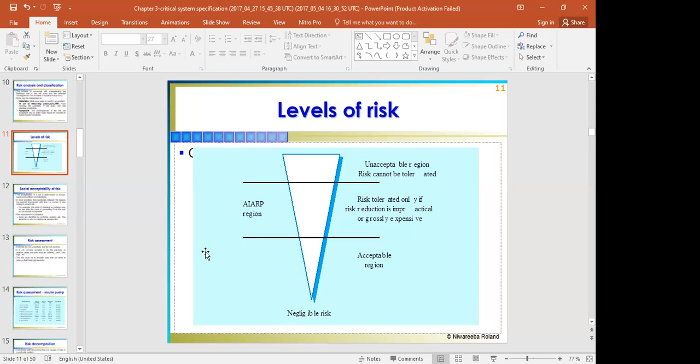So that's about the social acceptability of risk. This thing takes some time to change - I don't know why.

So the next is risk assessment. Remember, I'll just go back so as to keep us focused on how we are moving. We skip risk decomposition - just a second - risk identification, analysis... no, we didn't skip decomposition.

So risk assessment: estimate the risk probability and the risk severity. Once you've looked at these three categories, it's normally not possible to do this precisely, so relative values are used, such as unlikely, rare, very rare, high, etc. The aim must be to exclude risks that are likely to arise or have high severity.

This is an example, the insulin pump - this is its assessment, the assessment for the insulin pump. You can look at them individually later. Now, the risk assessment really is once you've finished the analysis, then what you've come up with - for example here is the risk assessment, like for the insulin pump, what you've come up with after you've done your analysis.

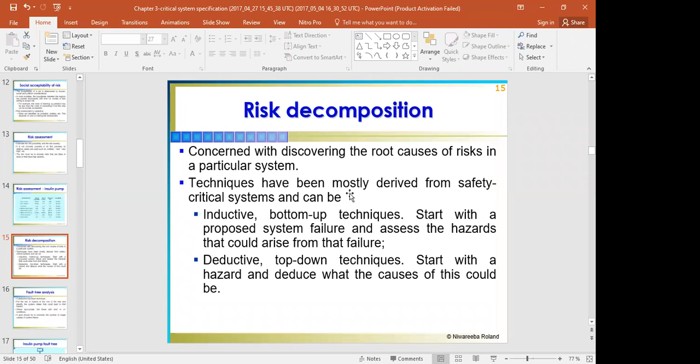Let us have a look at fault tree analysis, which is an example of a deductive top-down technique, and we shall see it in this diagram here. So here you put the risk or hazard at the root of the tree, and then you identify the system states that could lead to that hazard.

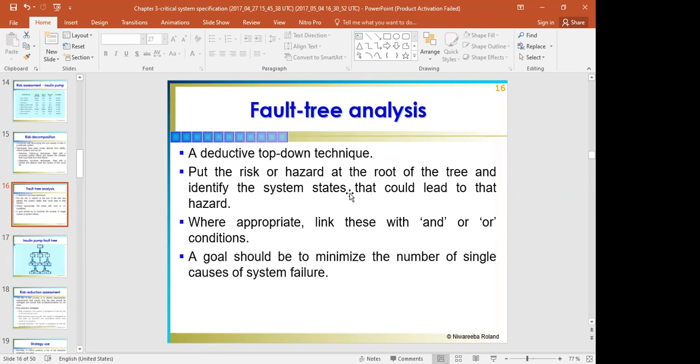A better way to explain this, because here they don't really give it in detail, I will refer you to this very book here. Let us look at it - page 13.

Here they give the detailed explanation of what we've been talking about. You put the risk hazard, the root hazard, at the root of the tree, and then you identify the system states that could lead to that hazard. This is exactly what is being done here.

Beginning with the hazard of incorrect insulin dose administered, they explain that there are 3 conditions that could lead to the administration of an incorrect insulin dose: incorrect sugar level measured, correct dose delivered at the wrong time, or delivery system failure.

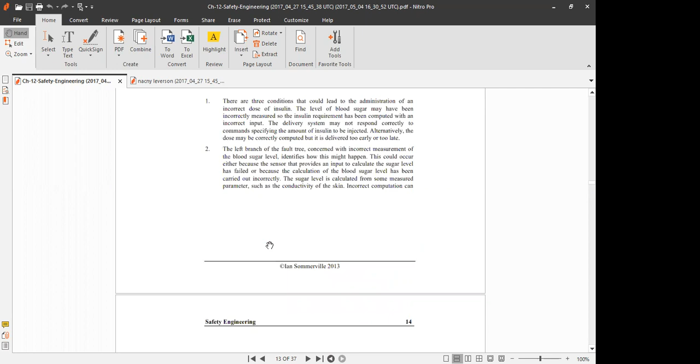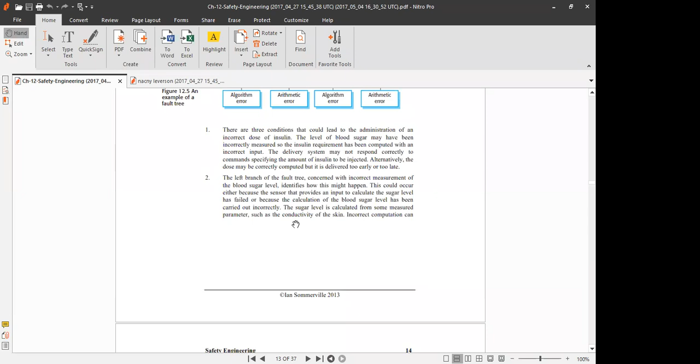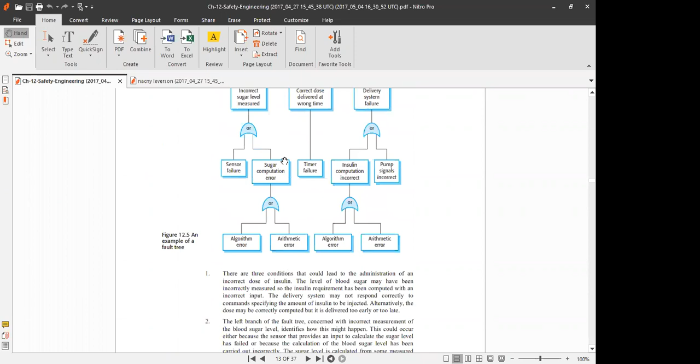If you go further, this one ends here, but then it continues on this arm. The sugar level is calculated from some measured parameters, such as the conductivity of the skin. Incorrect computation can result from either an incorrect algorithm or an arithmetic error that results from the use of floating point numbers. So you can see we have gone right up to the root cause. I hope this page is clear to all of you.

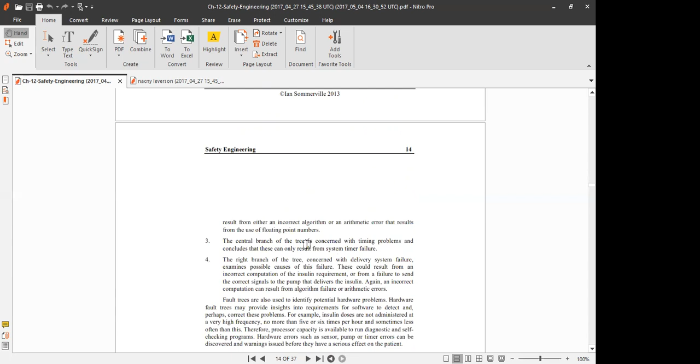The central branch of the tree is concerned with timing problems and concludes that this can only result from system timer failure. There you are, timer failure.

And then the right branch of the tree, concerned with delivery system failure, examines possible causes of this failure. This could result from an incorrect computation of the insulin requirement or from a failure to send the correct signals to the pump that delivers the insulin. So I hope you see the step-by-step analysis of the fault tree: insulin computation incorrect or pump signals incorrect.

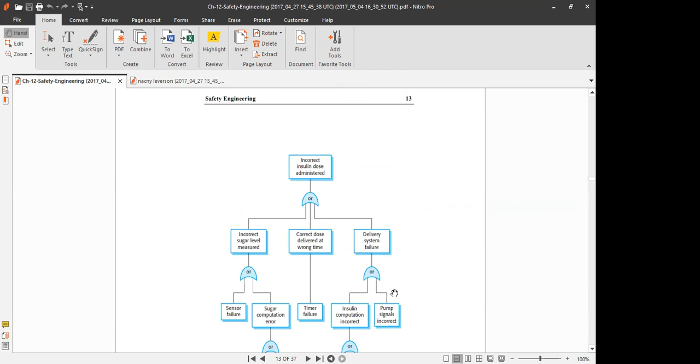Again, an incorrect computation can result from algorithm failure or arithmetic errors. Again you can see that here, up to the root cause. That's what they call the fault tree analysis, very well explained here with an example of the insulin pump.

I also want you to take note, however, of these fault trees. The fault trees are also used to identify potential hardware problems. They explain that further down here - fault trees are also used to identify potential hardware problems. Hardware fault trees may provide insights into requirements for software to detect and perhaps correct these problems.

For example, insulin doses are not administered at a very high frequency, no more than 5 or 6 times per hour, and sometimes less often than this. Therefore, processor capacity is available to run diagnostic and self-checking programs. Hardware errors such as sensor, pump, or timer errors can be discovered and warnings issued before they have a serious effect on the patient. I want you to take note of that as well.

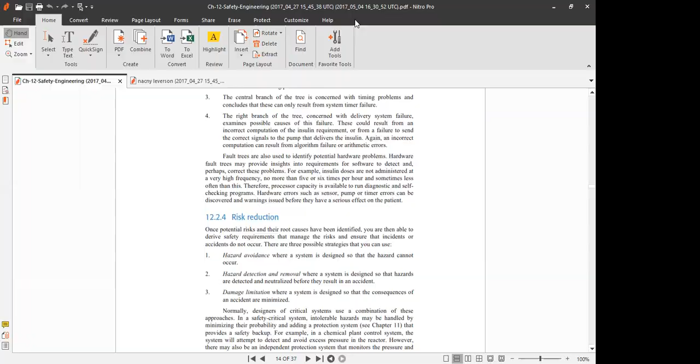So we can go back to the PPT. That's the insulin pump fault tree. It's the fault tree analysis, but we're looking at the insulin pump particularly as our example there. So let me share my screen.

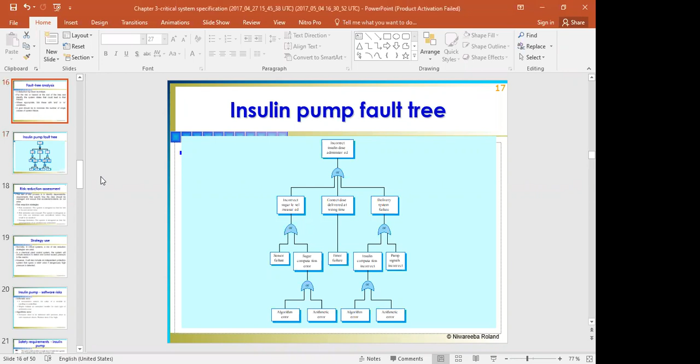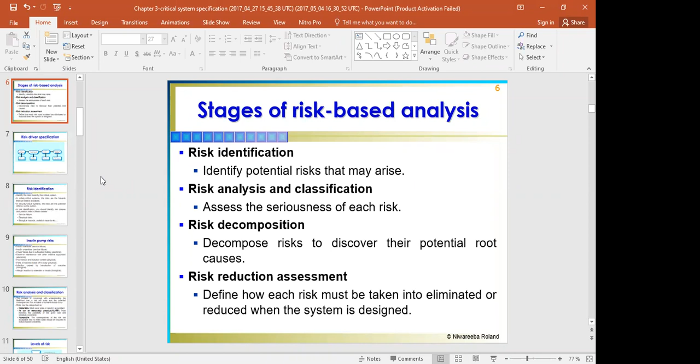So we have finished risk identification, risk analysis and classification, risk decomposition, now risk reduction assessment. We have to be systematic in this and not get lost. So that's the next one here, the risk reduction assessment. The aim of this process is to identify dependability requirements that specify how the risks should be managed and ensure that accidents or incidents do not arise. All the steps we have been taking all come up to this point - the dependability requirements that you're going to come up with to reduce your risk.

And these involve 3 risk reduction strategies, of which we have risk avoidance: the system is designed so that the risk cannot occur. Then we have risk detection and removal: the system is designed so that risks are detected and neutralized before they result in an accident. And then we have damage limitation: the system is designed so that the consequences of an accident are minimized. So these ones here are not new, at least.

You have them there. But then also the designers of these systems may use a combination of these approaches, because of course you're not going to say you're going to only use one, depending on how your system is and the risks that you've come up with, you may have to have different ones.

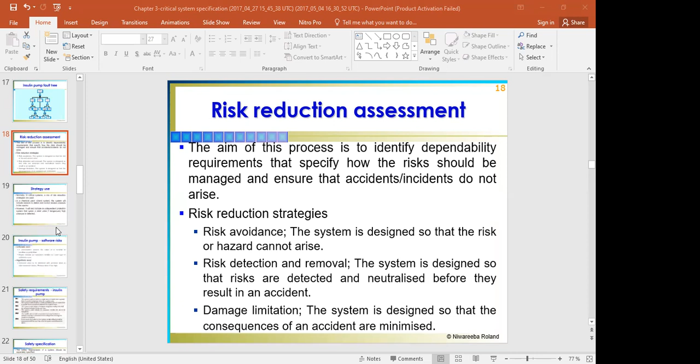Okay, to the next. Yes, that's what they talk about next there.

You can have a mix of risk reduction strategies. In a chemical plant control system, the system will include sensors to detect and correct excess pressure in the reactor. However, it will also include an independent protection system that opens a relief valve if dangerously high pressure is detected. So you can mix, you're not tied to one.

Not tied to one. Okay, so we talked about this. We saw this already, just explained further here, but we had seen them already from the function analysis.

So some of the safety requirements of the insulin pump - these are examples of safety requirements that you've come up with. Remember, we're coming up with dependability requirements, and dependability involves safety, security, availability, and reliability. So among the dependability requirements, we have safety requirements of the insulin pump.

The examples are here. SR1: the system shall not deliver a single dose of insulin that is greater than a specified maximum dose for a system user. So that one is a safety requirement - the system, even if it makes a mistake, as long as it doesn't go beyond a certain maximum, it's not as dangerous. So something may go wrong, it gives the wrong amount of insulin, but then not going beyond a certain maximum.

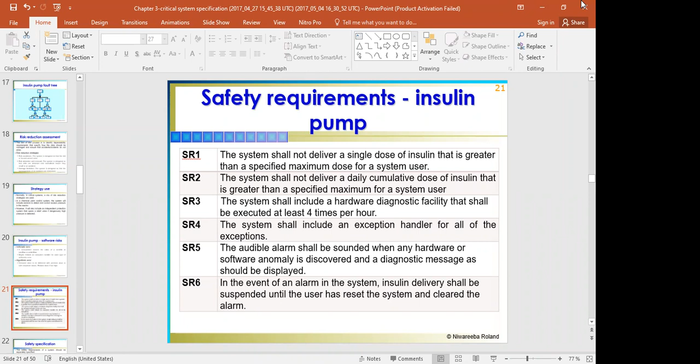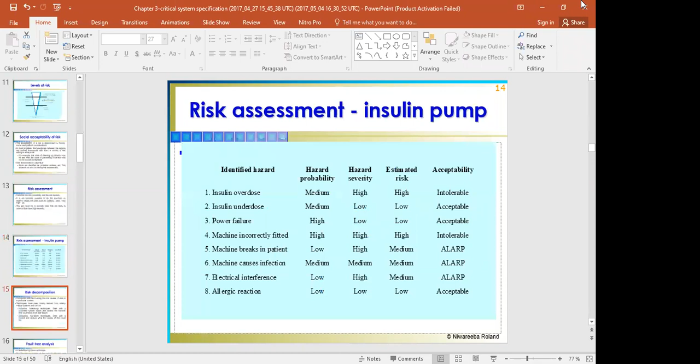Safety specification. Remember, if I go back up, we looked at risk-driven specification. Now we're looking at safety specification. Although for the safety specification, we actually looked at some of them last time, because it deals also with that standard IEC 61508.

The safety requirements of the system should be separately specified. These requirements should be based on an analysis of the possible hazards and risks as previously discussed. Safety requirements usually apply to the system as a whole rather than to individual subsystems.

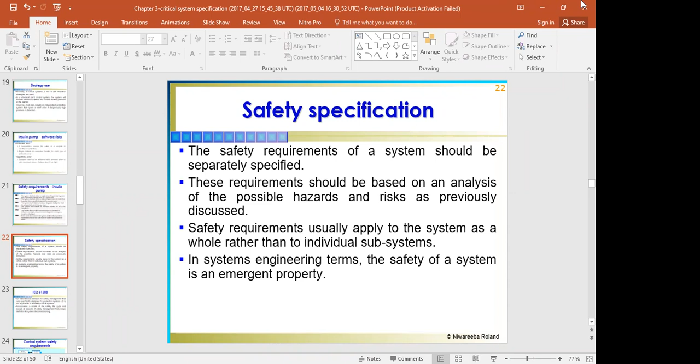And in systems engineering terms, the safety of a system is an emergent property. We saw this standard here - we were talking about this standard just in the past lecture, IEC 61508. It's an international standard for safety management that was specifically designed for protection systems. It is not applicable to all safety critical systems.

So we saw this last time, so we shall not go into so much about safety specification. This standard incorporates a model of the safety life cycle and covers all aspects of safety management, from scope definition to system decommissioning.

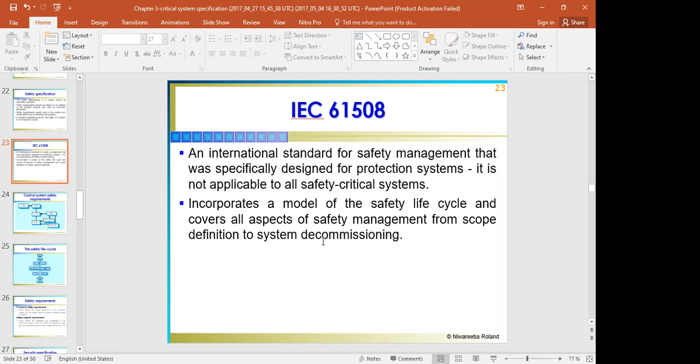And that's the safety life cycle - there's a picture of it. Starting from the concept and scope definition, hazard and risk analysis, safety requirements derivation and allocation, planning, validation and O&M and installation, safety-related systems development, external risk reduction facilities, then safety validation, installation and commissioning, operation and maintenance, and then system decommissioning. So the safety life cycle really of any system, of any system.

Okay, that just shows that life cycle.

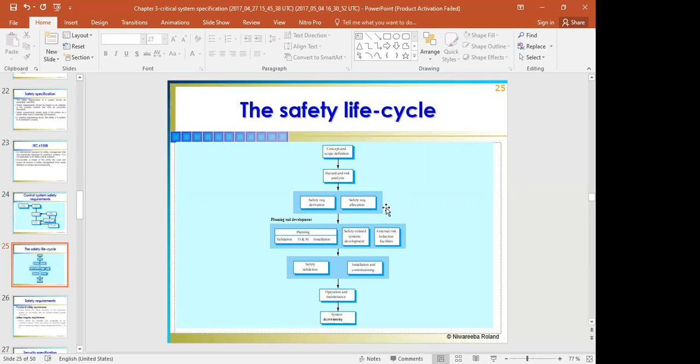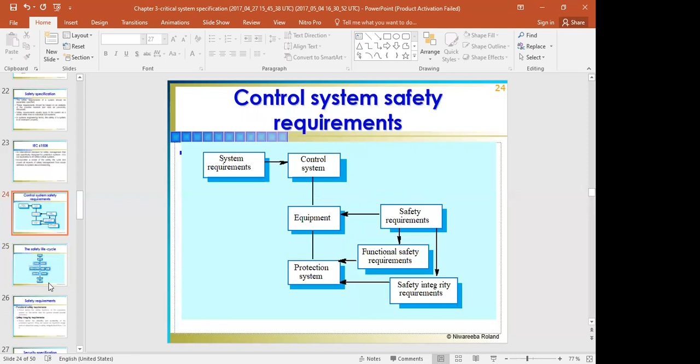Safety requirements include what we call the functional safety requirements and the safety integrity requirements. The functional safety requirements define the safety function of the protection system, in other words, how the system should provide protection. The safety integrity requirements define the reliability and the availability of the protection system.

They're based on expected usage and are classified using the safety integrity level, from 1 to 4, which we saw last time.